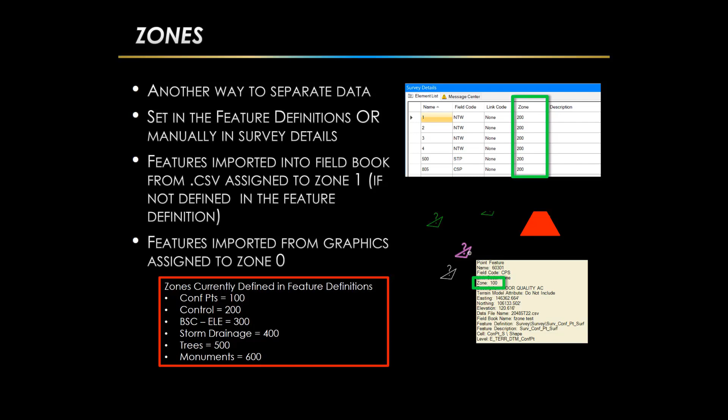So the next new thing that we've discovered since our initial training is the use of filters. Filters are not a new concept with MicroStation. InRoads had them with the survey style filters in our Fieldbook and the feature selection filters with our surfaces. Filters just allow you to easily turn your data on and off and show the filtered data in the survey details.

So we've created a group of filters that will load whenever you use the seed files. They are programmed in our seed 3D, seed topo, and seed right-of-way 2D seed files. I am the one that came up with this filter list, based upon going back and looking at the InRoads filters and my own experience with what type of data typically needed to be isolated and exported. So the first filter is check shots.

Is anyone seeing, can you see my mouse move on here, or do I need to use my laser pointer? There we go, we can see your mouse. Oh okay, alright, sorry, I wasn't able to get comfortable with the additional tool, so I'm going to have to use this.

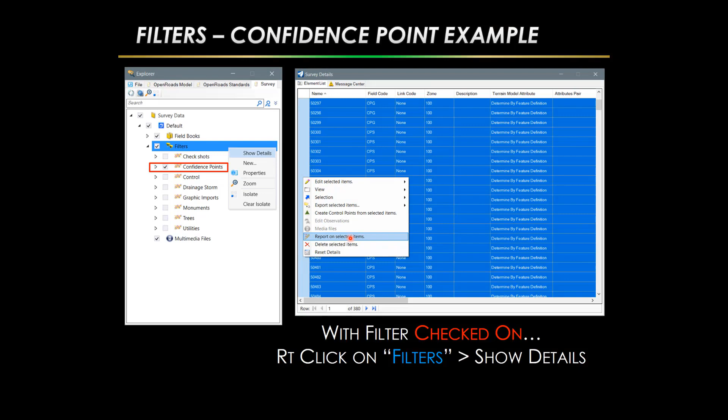So this is what that looks like, this is the report on selected items option. It's familiar, just like we would have gotten in InRoads, slightly different reports, but I've got my list of reports here, and you'll find there are 3 different reports that you can choose from that might be useful for confidence points. If you're transferring these to a spreadsheet for tracking purposes, or maybe to use in VG or some other software, you'll likely want to use this CSV style sheet and then do a file save as to export this to get your confidence points out of the field book. Then you can bring them into your spreadsheet to make your text file for VG or whatever else you're doing.

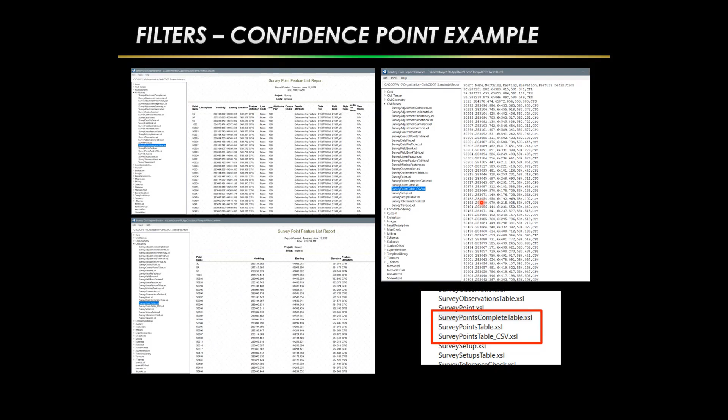It's the same thing with control. I used to always keep a master control text file for the project I was working on, and oftentimes we were doing that with the filters in InRoads as we initially processed the field data. So you can do the same thing in ORD. As you're processing your topo files, you can use this control filter to isolate all of the control points in the survey details, and then run a report on those selected items, and save that text file from the report browser.

So with this checked on, I can right click on my filters, do a show details. It isolates that in my survey details dialog. I can select it all, right click, and do a report on that. So all those capabilities are still here in ORD, just like we did in InRoads, slightly different process.

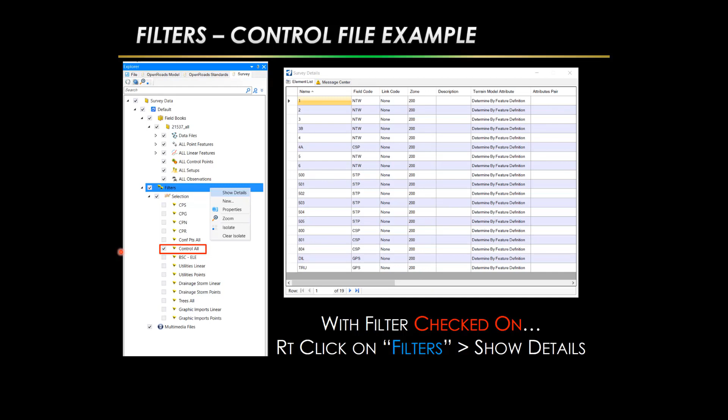So what if I want to create a customized filter that's not already defined? Well, you can do that pretty easily by just right-clicking on the filters header, right here, and selecting New. A dialog box will appear, and you can give it a name and a category. These main headers are called categories, and underneath that you have your individual filters. The category is not necessary, but if you want to use it, it will give you the drop-down tree structure like we have in these existing filters.

If you're creating a filter for linear features, you will likely also be creating a filter for point features that make up those linear features. So in that case, you would want to use your category so that those are linked together.

And once the name and category are defined, then you can set the filter value here by selecting that ellipses box. And that will open up another dialog. There's a few dialog boxes that pop up as you're working through this. So this dialog box will be empty right here until you select new to define your filter values. From there, you can select the object type.

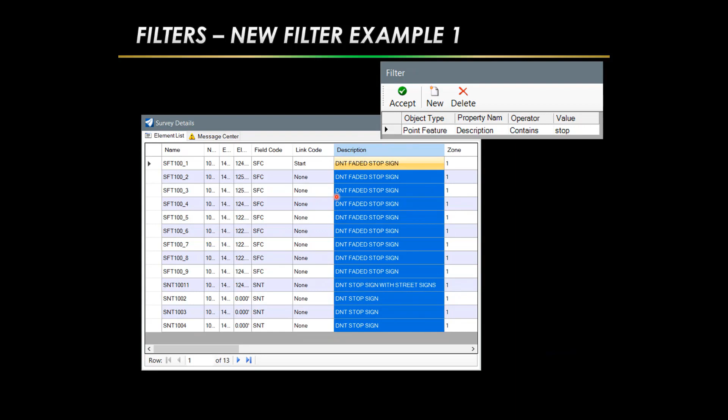So that is creating a new filter, and then with that selected, it will bring all that up in your survey details.

So I'm going to do a quick demo of this. Let me shuffle my stuff. Are there any questions on that?

I got one, John. Okay. Just curious, if you create a new filter, does it persist then? It will persist in your file, but it won't persist in any new files.

So let me change what I'm sharing here. Oh, there it is. That's pretty easy. Trying to do this in Teams, a little different than Zoom.

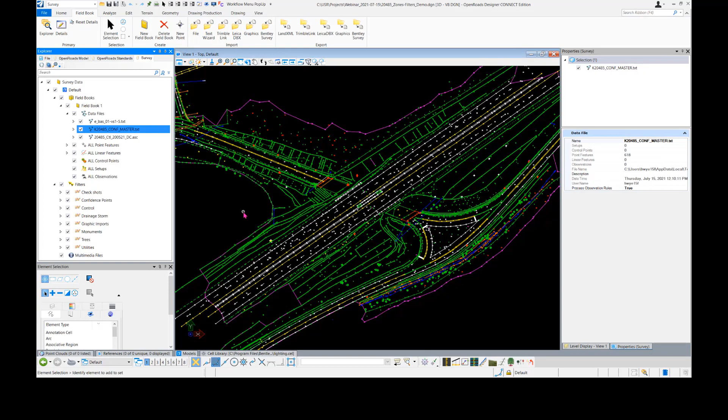So I have a file here, an ORD file. I created this using my seed 3D seed file. All this data came from InRoads. So we've got a process to bring InRoads DTM data into ORD Fieldbooks and then create terrains from them, and that's what this data is.

So pay no attention to this stuff right here, because it's not how I would like it to be for our workflow, which we'll hopefully get to today. But let me go to my survey details here on my point features, and I will show you the zones that are assigned to the different features.

So I said earlier, zone 1 is whenever you import data from Infinity or from any CSV file. Whenever you import it, if it does not have a predefined zone, it's automatically assigned to zone 1. So we've got a bunch of data here that's on zone 1. I remember when we first got ORD and I was looking at this, I was like, why are there zones? Everything's on zone 1, and how does this work? Eventually I figured it out, but I'm going to flip this.

So here we've got a zone 500 on this one, and notice it's a tree, coniferous. If I scroll down through this, there's a zone 100 right here, and notice it is a confidence point surface. I've got a zone 200 here, it's a network point. Zone 200 here, it's a confidence controlled strap point. You can go on up. There's a GPS point under zone 200.

So it's automatically assigning those zones based upon the feature definitions. We've assigned those zones in all of these feature definitions. Here I've got a zone 400 for my drainage stuff. I can easily go turn it off. So those are useful

for isolating data. So if I want to see nothing but my storm or utilities, let's say utilities, let me go turn everything on now. If I go turn it all off with this checkbox, everything goes off. I can turn it back on. Do you see stuff changing? Yeah, you should. So you can see all my utilities.

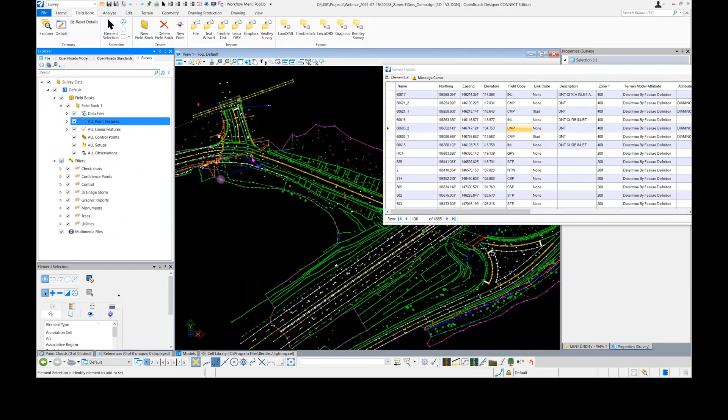So if I want to isolate those utilities, I can turn off my Fieldbook. Everything goes off. And I can turn on my filter for utilities, and it's going to show everything that is under that utilities filter. So pretty handy if you're just working on utilities and you just want to see that.

It's pretty difficult to drill into some of these, all point features, and select them all so that you isolate it. You could also go work with your levels, but the more I work with ORD, the less I work with levels, because we have these tools here. If I want to see just my drainage, my storm drainage, I can isolate it that way.

So let's say I wanted to create some zones on maybe my generic break lines and my break lines. So I can isolate this data in my Fieldbook. By selecting them, I should have only my break lines and generic break lines selected. Do I not have any generic break lines?

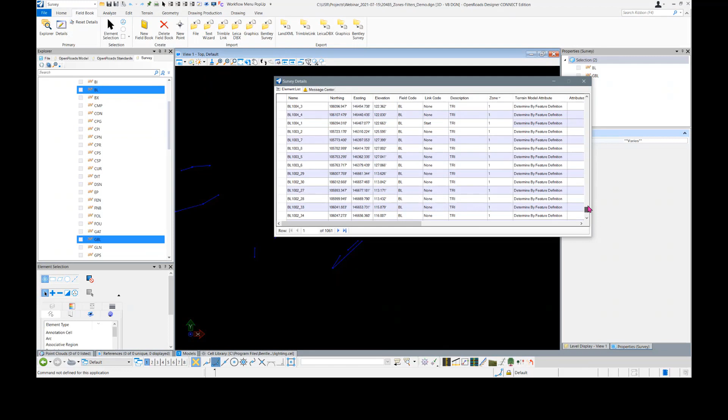So I'm going to edit this zone. Just going to say it's zone 50. Let me go to my generic break lines - not many of them. Let me edit that zone, zone 50.

Okay, so I've added a zone to those, and I want to create a filter so that I can isolate those in my survey details. So let me go here to my filters. Again, I can right click on this header, go to new. I can give it a name, break line, GBL - I'm just going to call it demo test for the category. Go and enter my filter value using this ellipses.

Again, my thing is blank. My dialog box is blank for this filter until I hit new, and then it pops in there. I can tell object type, point features - I'm going to go ahead and do just linear features.

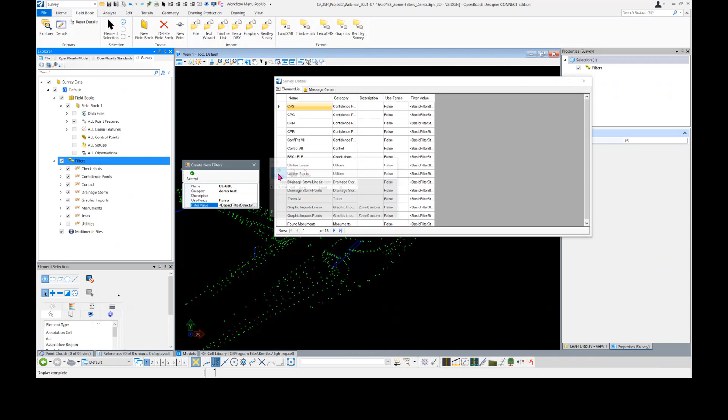I'm going to do it by zone equals 50, and I have to hit tab at the end of this. Notice there's a little pencil here - I have to hit tab at the end of this for it to take. If you don't hit tab, nothing's going to happen, and it won't tell you 'hey, you forgot to hit tab,' so you just got to remember to do that. I hit accept, puts it in there. I hit accept again.

So I have my demo test that I just created, and I'm going to turn all this data off. So I got my demo test - that's all my break lines and generic break lines. I can go up here, do a show details, and then it should have all of my break lines and generic break lines in there. Yeah, and there's only one generic break line in there.

So that's a really quick rundown on zones and filters and how you use them.

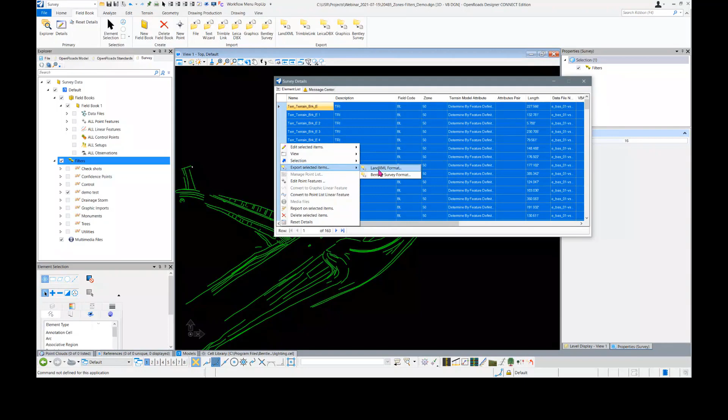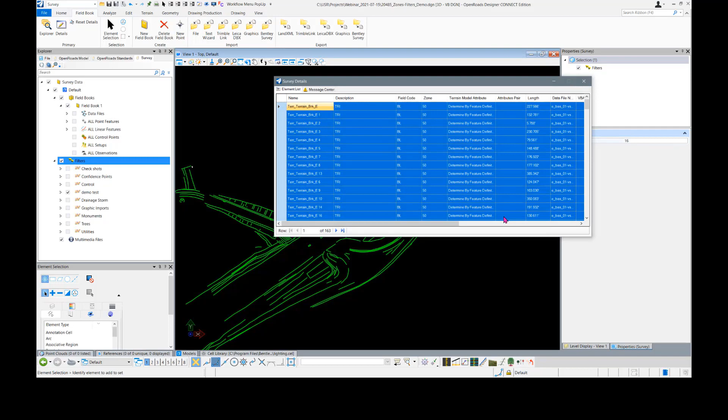Let's say I wanted to export this. I could export this - I didn't show this in the slides, but I could export this as a Bentley survey format or SQLite file. Go ahead and do that. Let me save this as my... and again, this SQLite file is kind of operating like we would have worked with a FWD file. Go ahead and save that.

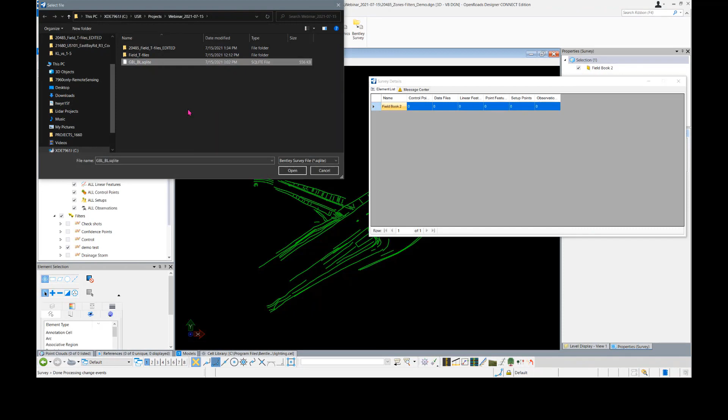And for demonstration, we're just going to create a new Fieldbook here, and I am going to import that SQLite file. So I can right click on my Fieldbook 2, go down to import, Bentley survey format - there's my SQLite file that I just exported. I can select that, say open. We'll talk about this - this is what I was talking about with the point renaming, you could add prefixes and suffixes. I don't need to do that for this, but I'm going to hit import.

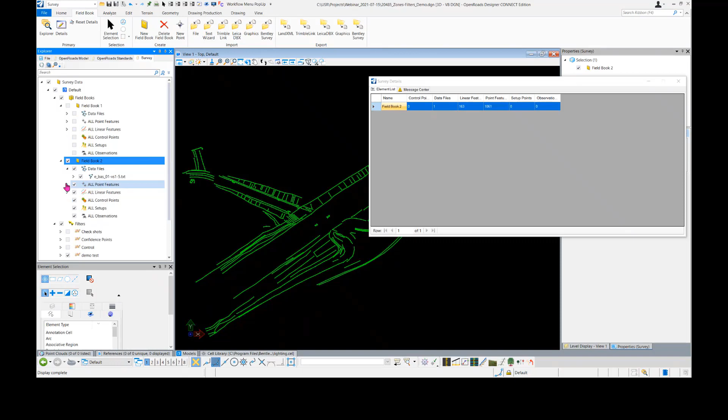And this data is all off, but I did just import my break lines and generic break lines into here, points included. Minimize that.

So files get corrupted, believe it or not, and the organization method I'm about to show you will hopefully make your life easier when it happens. Just this morning, I was talking with someone who had a corrupted file with all of their eggs in one basket, to no fault of their own, because they didn't know about this. But if they had organized their files using this method, it likely would have saved them some time, maybe getting it all back together. So my recommended workflow is this.

So for each topo file you process, you will have a CSV file that you have exported from Infinity. And hopefully you've made some edits in Infinity - you know, you've checked all your heights, set up information, you've maybe modified some field codes, checked your offsets and all that stuff. So hopefully you've done all that. You've exported your CSV file from Infinity.

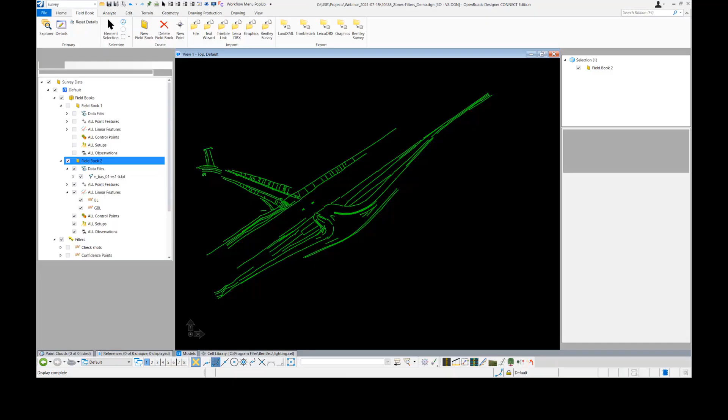I've already got ORD open in an effort to save a little bit of time here. So I'm going to go ahead and do a new. Stuff's popping up on the other screen. Do a new folder here, demo. So my first file was...

20485T02. I'm going to name it the same, and I'm going to use my seed 3D. Okay, go ahead and save that. It's going to open up here.

I'm going to create a new field book with that same name. Hopefully you can't hear my 2-month-old crying in the background. I keep getting stuff messed up there.

I'm going to import my Infinity CSV file into there. Right click on that fieldbook name, import file. Got my T02 CSV. I didn't choose the right format when I did that, so I'm going to delete it and do it again. Right click, import file, choose my text import wizard file, and do a T02.csv.

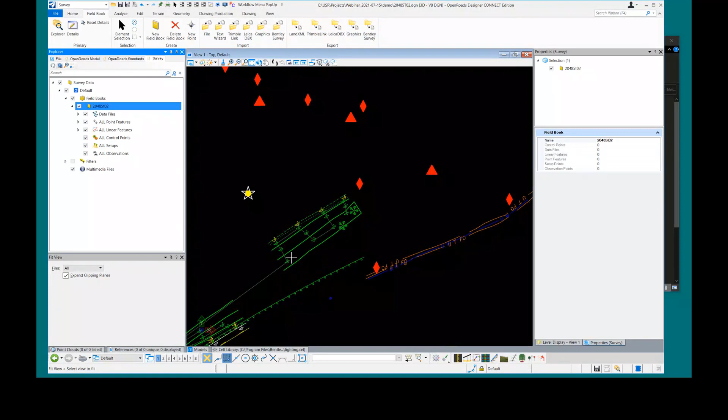Fit my view, so I've got all my data in here. This is where I could use my filters to maybe export my control points, or export my confidence points to another file. I could start doing my edits. So I see I got confidence points with a start code on them, so maybe I want to get rid of that.

Let me drill into my survey details and make a little edit here. Let me find my confidence point surface. Those aren't surface, those are naturals. See, I've got a start code on those and they should not, so I can just get rid of that.

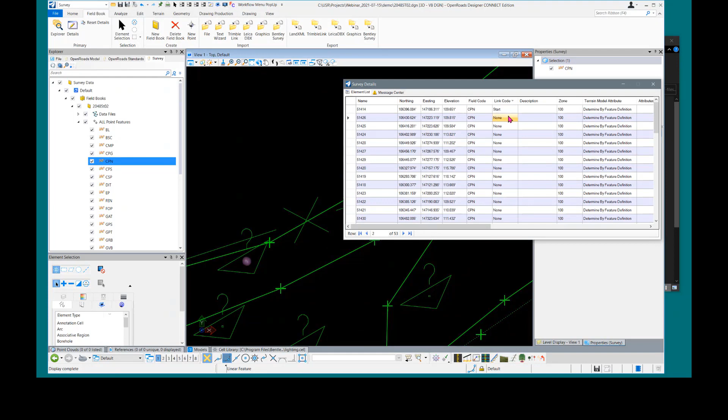Maybe I wanted to add some descriptions on these utilities in here, so let me find those utilities. Those are fiber, which is FOP. I know that they're all CenturyLink, so I'm going to make some quick edits to that, so it's all CenturyLink. Say okay, so I'm good.

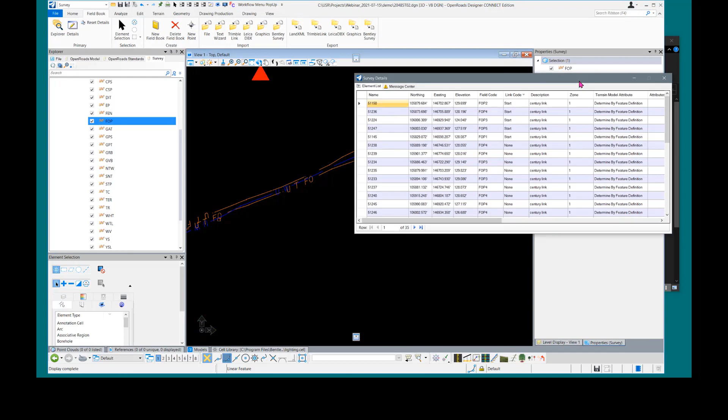I made all the edits that I need to make. I can then export this. Right click on that fieldbook name, T02, do an export to Bentley survey format. Make sure I'm going to the right folder, and it's going to automatically name it whatever that fieldbook name is. I'm a little bit too picky, I like to have those capitalized, but I can hit save.

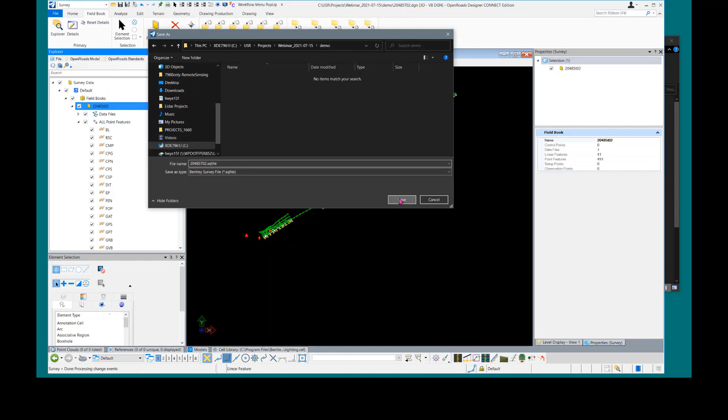So I'm done with this. Let's say the field crew went out and got another one. I could go do a new file, T03.

Create a new field book. I'm going to import my Infinity CSV file. It's T03, I messed up on that again. T03 is the next one, I can change that.

Oh no, I've got some duplicate features. Here I've got, they have the same name, 5509. For this, I'm just going to skip it because I know what happened there. You can look at these differences and see what's going on. We had some stuff get overwritten, but I'm going to go ahead and hit apply, apply, apply.

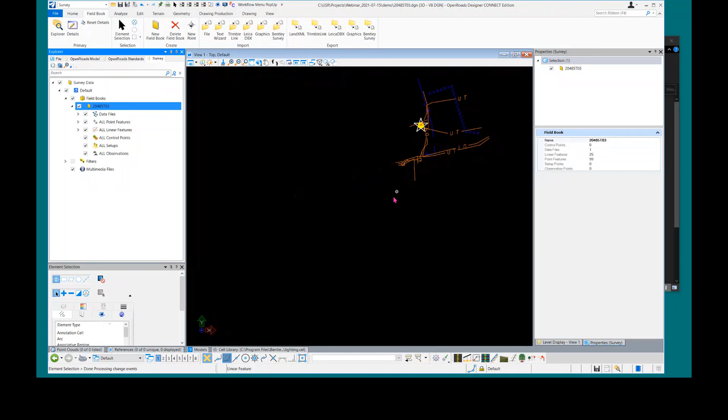Fit in my view. So here we had some missing start codes, so maybe I want to go do some start codes. I'm not going to get into editing on this, but that will be the next webinar. I can make some changes to that, and then rename this to T03 just to keep my stuff straight.

I can right click on this, do an export to Bentley survey format. It automatically names it what your field book is, save it in there. Once I've got a couple of those, I'm going to start a working base map. I'm going to go ahead and name this what I would if it were in ProjectWise.

So I've got a couple going, so I can now create my kind of merged, or all field book, in here. Let me go this way, it's a little easier to type these in.

I can now right click on that field book name, do an import, and do a Bentley survey format. I've got my two SQLite files. I can only do one at a time, so I'll do my T02. It brings up my dialog box. Here I could add a prefix or suffix if I would like. It's going to import it.

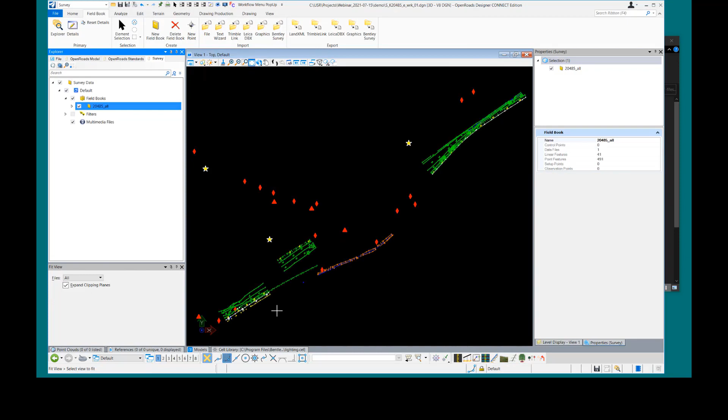I can do a fit view. There's my T02 that I brought in. Notice my edits have stuck, so I had a line going through those confidence points that I didn't need. I think I changed these fibers to CenturyLink with a description. Notice it's still on there.

And it ties that data back to that CSV. It's not linked, but it still shows where that data is coming from, that T02 CSV. I can then right click on this again, do an import, Bentley survey format, do my T03.

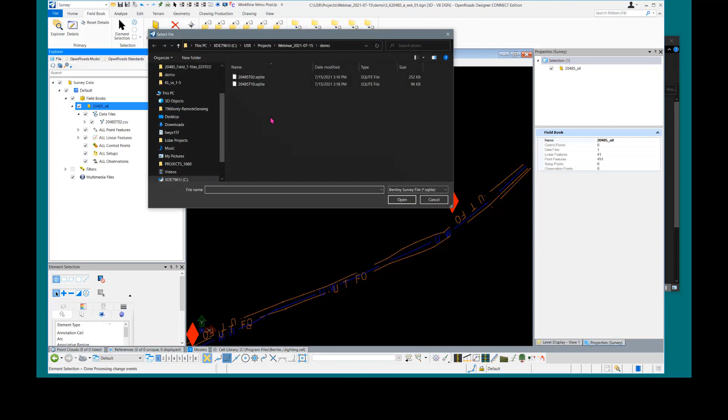Again, it's asking me if I want to add a prefix or suffix. I don't for this. Here I've got duplicate control points, which is what this is. I can go take a look at the differences.

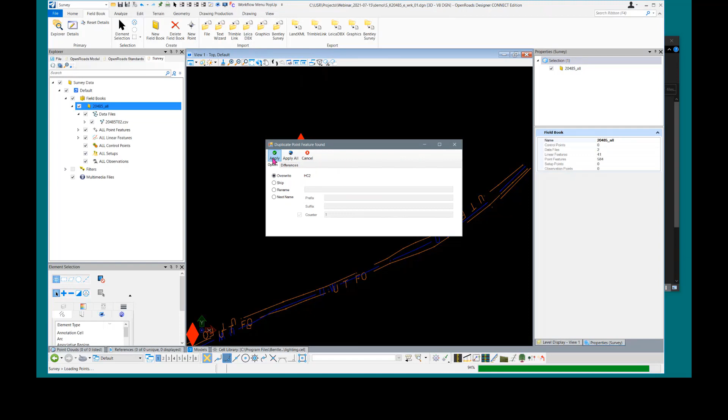I do know that there were some elevation issues on one file here, so I'm going to skip or overwrite this BMP. So I'll apply this, and again another control file where they change the elevation, and another one where they change the elevation. So now I've got my T10 data in here, which was up here.

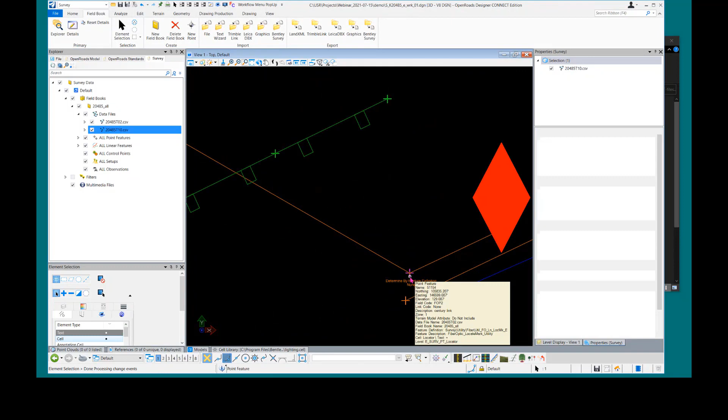Now I can start to make some edits across these different topo files. Notice how this fiber line connected up because they have the same field code name. There's a couple different ways to fix that. I'm not going to get into it much here, but I'm going to go ahead and put an end on this.

So that's the general process, and I would continue that on with the rest of the topo files that I've got. That is the recommended way that I see doing it. I think if you only had one or two files for a project, maybe you wouldn't have to go this way. There's another way you could use, and I'm not going to have time to get into it today because I want to open it up to some questions. So we'll touch on that at the next one.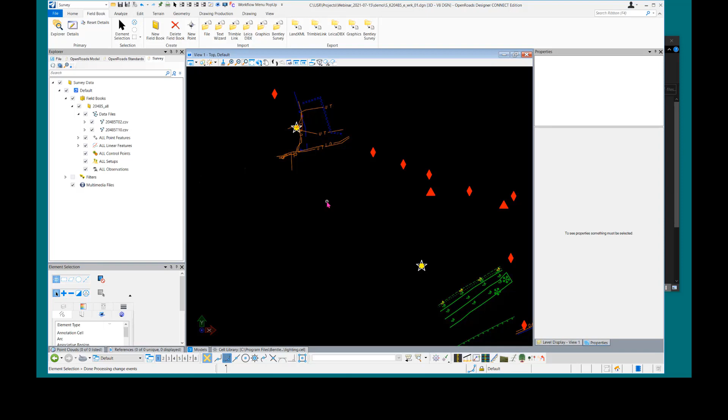Any questions? Do you have any questions for me? Is this mostly just to avoid crashes and backing up work?

You know, I think yes and no. Yes, that's one of the big drivers of it, but it's also just a way to keep your data super organized. There was a crash just recently with a pretty large ORD file, and I think if it had been set up this way, it may have been a little easier to recover. We were able to recover it all, but I think you could have more quickly done that.

I think this is also a good method for our larger projects where you have a couple of different people working on different parts, because then they can work independently. You don't have to worry about conflicts of whether somebody has the file locked out or anything like that. And it does give you a direct path to be able to put those pieces back together.

Yeah, and it's really important if you've got a field crew that wants to maybe look at their data, and when they look at it in ORD, maybe they make some edits and want to pass it on to the analyst if they're grooming the base map together. Or maybe you've got your field crew leader and your tech working on the same project, and one processes one file and one processes another. This is a way you can get everything merged together from that.

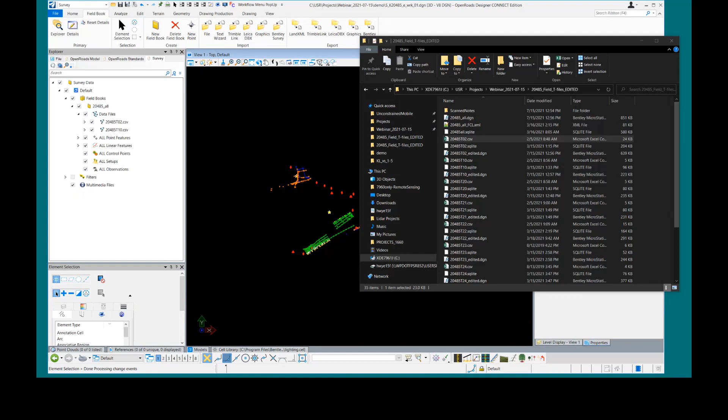I guess I had a question, John. I noticed in that image of your file structure, that you also had a DGN. So you would have your CSV out of Infinity, your SQLite saved, but to get an SQLite, you have to have a DGN to be able to edit it. Is that why it's in a DGN?

So you're creating a new DGN to edit your CSV, which then you will export. Yes, you have to create that new DGN and create a new field book, then import your Infinity CSV file, make your edits, and then you can export that field book as an SQLite file. And then that SQLite file can be imported back into a different field book or a totally different file, however you want to work it.

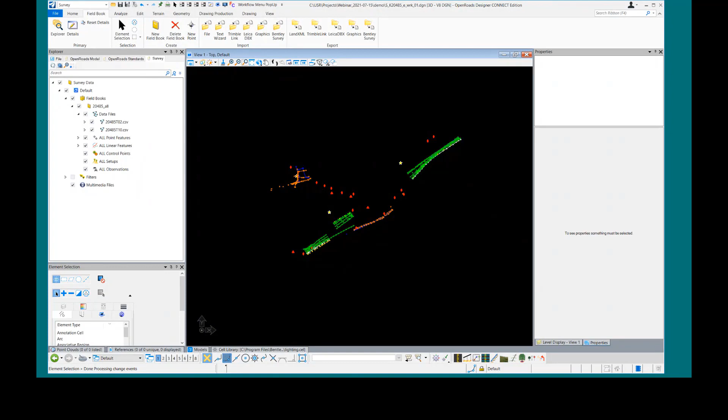That was my second method of organization. So if it's just you working on a project, if it were me, I would still feel more comfortable making a DGN for each topo file, making an SQLite file, and then creating my working one with all of those SQLite files imported back in. But you could have just a working DGN and then have multiple field books - each topo file would have a field book.

And then you only import that Infinity CSV for that topo file into that field book. Once you make your edits, you can save that field book as an SQLite file, and then have another kind of working file with everything merged together in there. One of the things - if your file gets corrupted, you hopefully got your SQLites as backups, but you're going to have to start all over from different things. So one of the benefits of doing it this way is that you're able to see all your data at once.

And if you're the only one working on it, this is probably an acceptable way to do it. As long as you're saving those SQLite files for your individual topo files as backups, but you're still going to have to merge all of those topo files together into one field book to create your terrain from, and your base map.